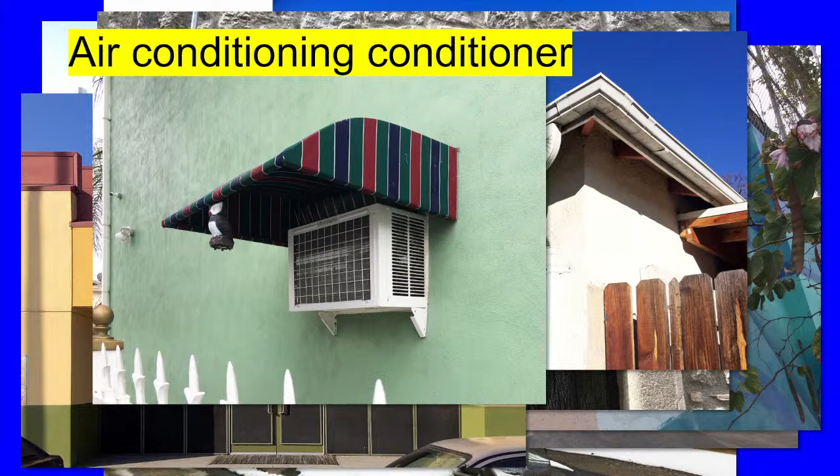In the book, there are technological adaptations that require pretty basic workarounds, recognition of the adaptability of the parking lot, which recurs. This is from outside the Foro Italico in Rome—this is the parking lot outside, and there's some construction going on around it, and there's just this eye from one of the sculptures basically parked in a parking lot stall.

The sort of flexibility of parking lots is something we've been quite interested in recently as well. They're ad hoc interventions that present practical solutions to problems not as far away from the field of architecture as they might seem. This is in the suburban area of Los Angeles, and it always struck me as something perhaps closer to a Venturi Scott Brown project than anything else, particularly with the antenna. This is kind of amazing.

Some of the images are concerned with the stubborn impropriety of life safety equipment and communication devices. There's actually a Los Angeles Times article about a kind of fungus creeping into a suburban home, characterized as related to the proliferation of satellite dishes around the city, or buildings that embody the formal qualities of a free, purportedly easy-to-use digital modeling software.

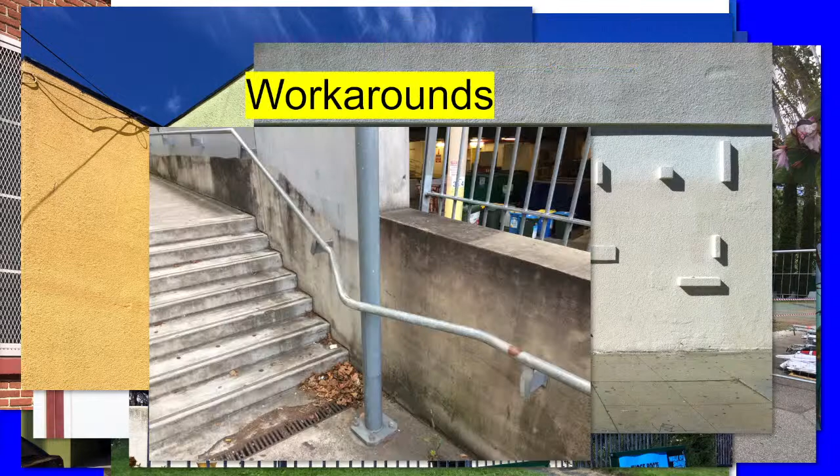There's objects which seem rudely unaware of their presence in disrupting a scene, and building elements that attempt to portray a stark and serious tone but instead end up offering opportunities for humor, irony, and pun. Buildings that call attention to themselves.

And those that call attention to the formal expression of security, the use of architecture to regulate space, not only functionally but formally, as an ever-escalating confrontation of resources that will demand increasingly radical tactics as economic disparity and housing instability continue to increase.

So while many of the images were originally circulated on social media, on an Instagram account which we took down, we thought it important to look to another space of distribution.

The book, called Best Practices, is a companion to architecture and its messy relationship with building materials, signage systems, communication equipment, plant life, and people. It was supported by a Graham Foundation grant and edited by Courtney Kaufman and Christina Muschel, a student of mine, with a foreword by Sylvia Lavin and contributing texts from artists and architects.

And it offers a way of thinking about neighborhoods, housing developments, streetscapes, storefronts, and interiors as places defined as much by building codes, dimensions, and geographic features as assemblages of impromptu interventions and incidental ephemera.

Trying to recognize that there's ingenuity out in the world, sort of ad hoc ingenuity, it's typically under-recognized in the field of architecture, and images like the ones I showed are typically not included in the catalog of references currently accepted by the field.

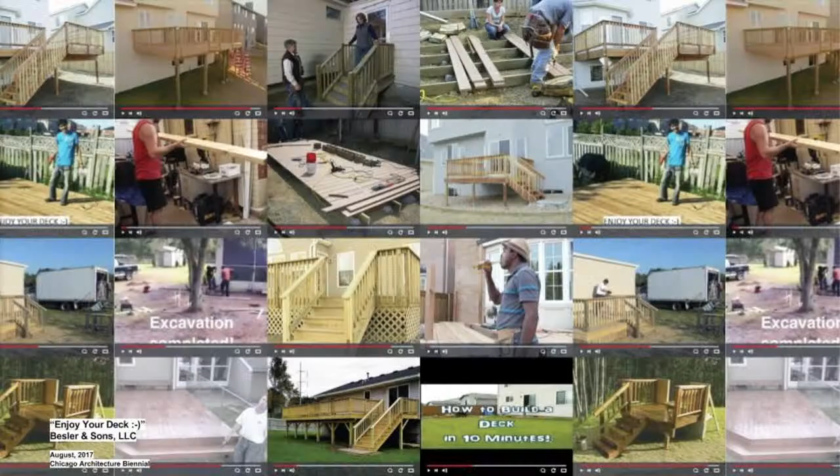This is a project that was exhibited at the Chicago Architecture Biennial, where we were asked by the curators to make a model of a canonical interior. That word, canonical, was something they gave to us.

This project is called Enjoy Your Deck, and it's an architectural model of an online how-to home improvement video of a backyard deck, constructed from paper and digital screens.

The project tries to reframe online video sharing platforms like YouTube as a contemporary category of media that circulates imagery while also generating its own set of language, media, data, and associations.

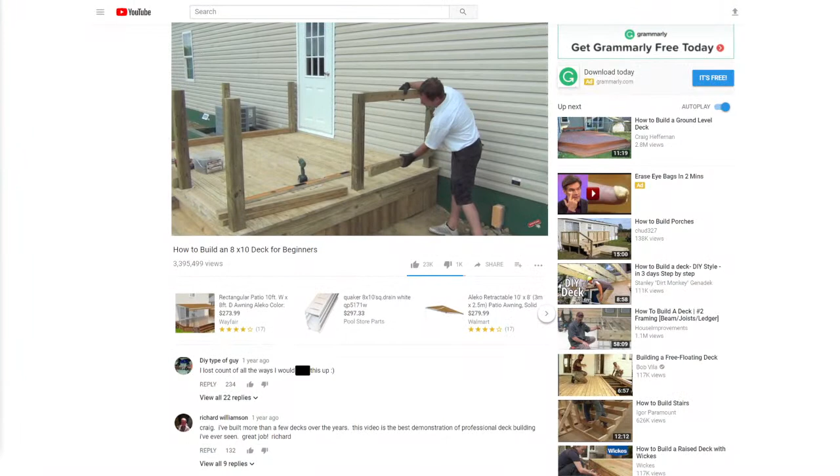Like through comment sections, view count statistics, recommendations for related viewing, pop-up advertisements, closed captions, and various options for sharing with friends and across social media.

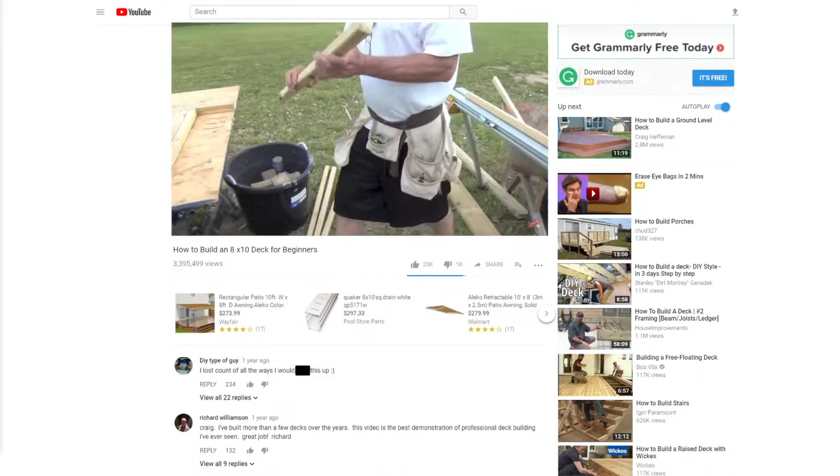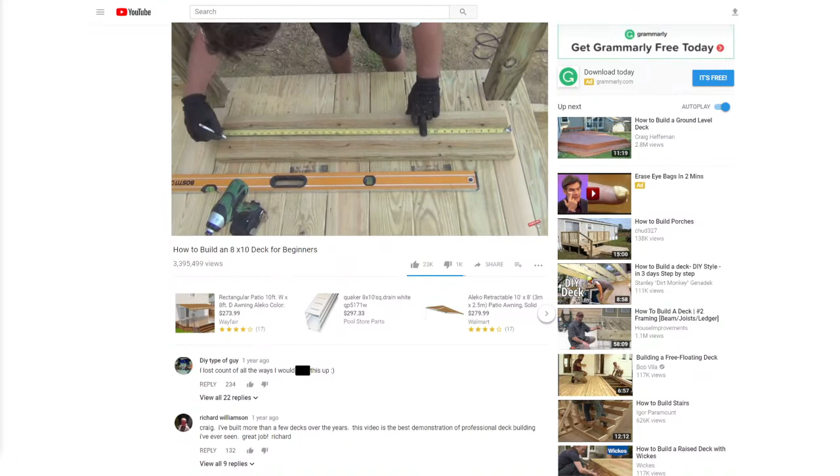Maybe because they're more easily relatable and somehow more linear than other kinds of instructional content like user manuals, these videos have become a way for individuals to find a meaningful forum to insert themselves as both producers and consumers into the discourse of designed objects and experiences.

Those short narrative clips that you find on YouTube for instructional videos provide an important component of how construction and building practices manifest in media imagery, and how issues of labor, competency, and discourse are staged around the sites of production.

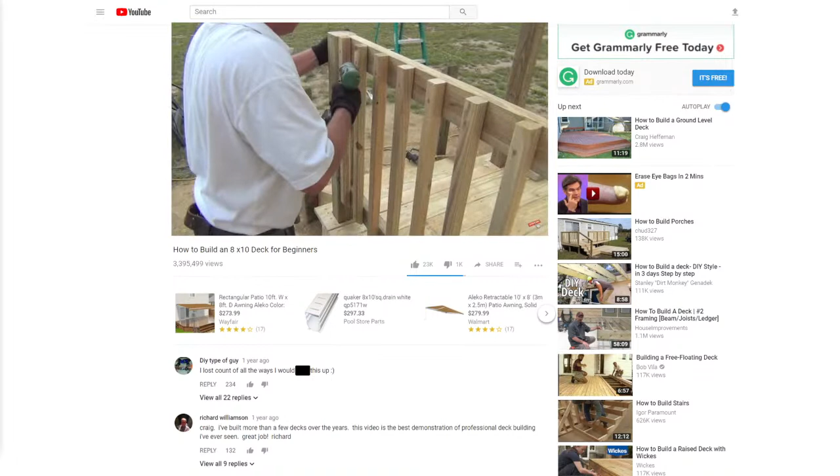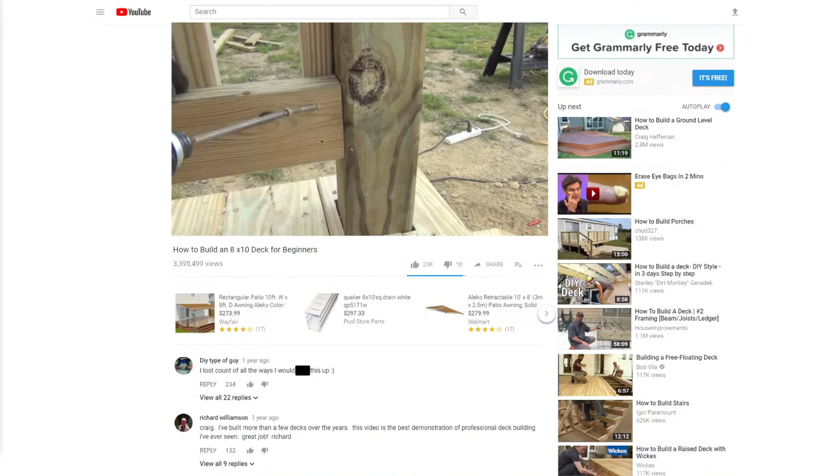What's kind of incredible is if you just search 'tutorial video' or 'instructional video' on YouTube, there's like 7 million results. So it's a lot — it's a huge category, one of the biggest categories of video on YouTube, like next to cats or something.

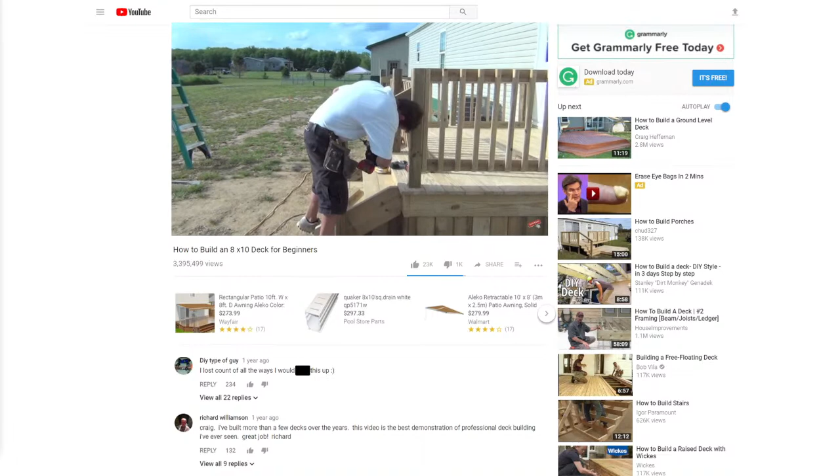So through sheer volume and ease of circulation, the category of media is elevated into the canon by presenting and prescribing the official way of doing things, and offering a space in the comments for ongoing litigation of terms, methods, and best practices.

Of the 200 million tutorial videos on YouTube, a huge number relate to relatively small backyard decks. So we made a scale paper model of a deck and made a YouTube video documenting the construction of it.

This requires just a little more than concrete, dimensional lumber, hardware, basic power tools, and a weekend. And given that almost all amateur videos are recorded in and around the home, whether in the kitchen, the bedroom, the den, or the bathroom, particularly during COVID, they're inscribed with a uniquely domestic focus.

So there's a really broad spectrum of instructional videos, from the concise and deliberate and coherent to really esoteric and bizarre instructional videos. I'm sure all of you have watched a YouTube instructional video, probably for software or how to do something in your home that you didn't need to know how to do.

But the sort of range of them and the capacity for us to comprehend them points to the potential that online media platforms possess for flattening previously recognized distinctions between amateur and professional practices.

So much of the content that viewers and software users encounter online today is dictated by the vagaries of search algorithms rather than other forms of defining expertise. Also PageRank algorithms, which often privilege categories such as collectively derived relevance and recently uploaded content over historically favored credentials.

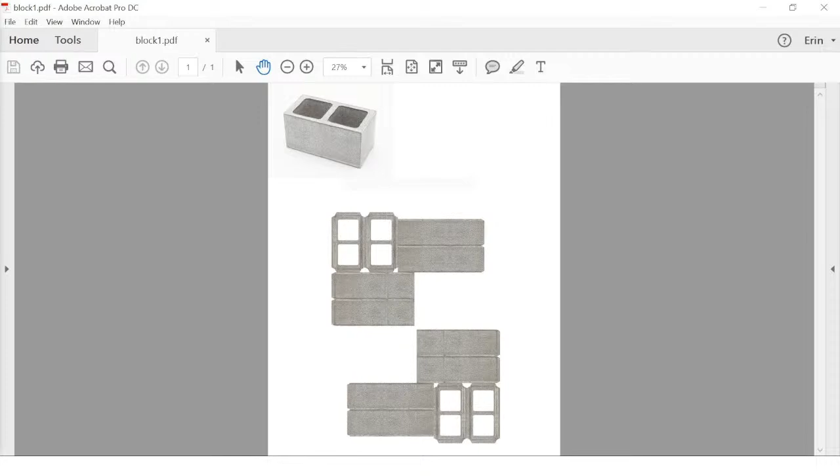So you can go to our website and download PDFs of these unfolded models and fold them back up and make an exhibition of your own. Everything from CMU blocks to trash cans and tape measures.

So we're in the process of making this into a book, which would include all these kinds of paper doll kits of backyard objects and tools, as well as interviews and conversations with builders and people that work in their backyards, as a way to begin to expand the project outside of the architecture world.

Alongside these questions of expertise, we've been working a lot on questioning the effects that architecture has had on the environment, which are staggering, really, really staggering. But our hope is that by reimagining and questioning some of the things that got us here, we can produce new models and values for architecture.

So more recently, I've been working with a group of students at Princeton and an organization called RARE in Philadelphia. It's a recycled artist residency located on a construction and demolition waste center in Northeast Philadelphia, called Revolution Recovery. And we've been working on issues specifically related to timber framing and the cycles of wood as a building material.

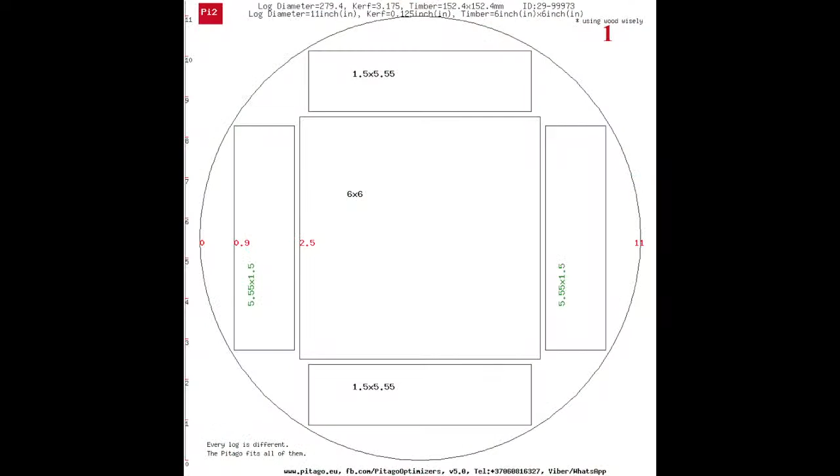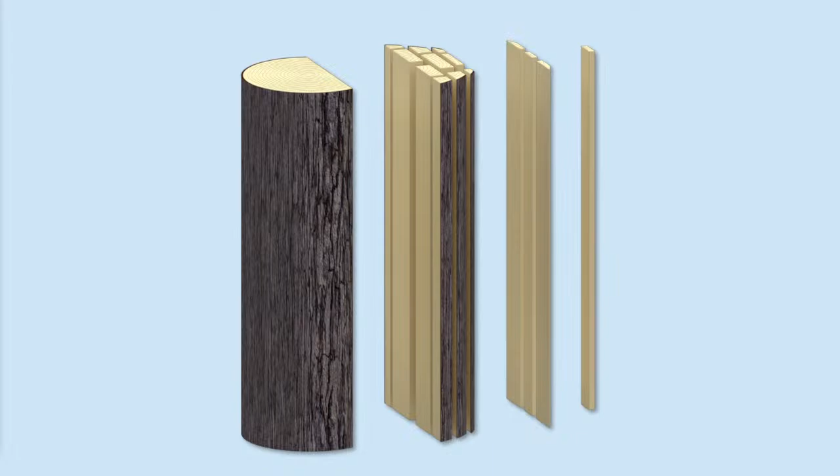It's kind of incredible the extent to which the processes that we impose on trees to turn them into building materials denature and abstract them, and basically turn them, in the process of industrialization, all into the same thing.

It makes it easier to forget that these things come from the earth and that they're actually not all the same. It actually makes it easier to throw them away.

So many buildings in the United States are built largely from wood, residential housing in particular. It's relatively fast, the methods are well known, the literature is widely distributed. This is a kind of amazing thing to me.

There are so many books on wood frame construction, for expert and non-expert alike. But it's all built on a continuation of the narrative of extraction linked to a definition of progress, from at least the early 19th century in North America.

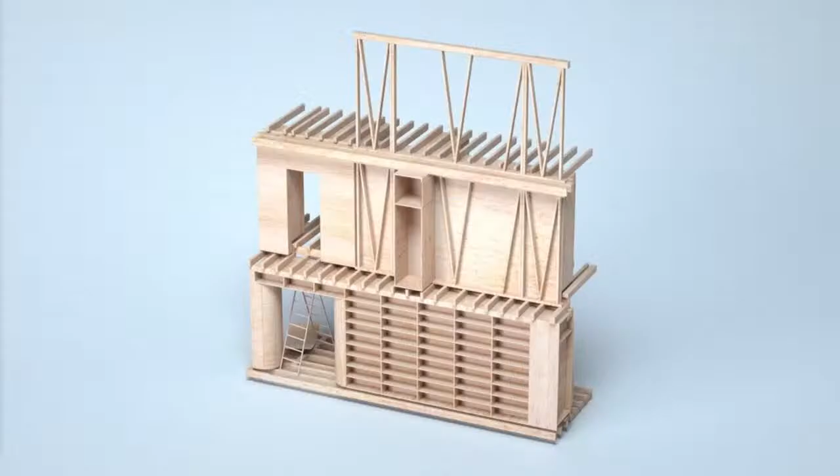Today, wood, or trees, are among a long list of material systems that stabilize, insulate, weatherproof, and make homes meet the standards of habitability today. At the same time, those things that make buildings work also make them more opaque to the average person, making it harder for homeowners and occupants to understand what's in their home, what it's made of, and harder for them to have access to it and know what to do to maintain it.

So we've been working on ways to catalog houses and reimagine them as representations of some of the largest building stock, as material banks, not just as where material goes to die. Reimagining them as material depots to be recirculated and used again, shifting the extractive conception from something stagnant or valued largely by the number of bedrooms and bathrooms, driven by the real estate industry, to something valued for its material composition, like a material supply center for future use.

So these are images of a house that we're working on right now. The ideas are not new and have been largely informed by conversations with an engineering firm called Arup and their work into circular design.

Parallel to looking at existing building stock, we're also interested in the implications that surround ideas of deconstruction rather than demolition.

If people had access, if you reconceived a wall not necessarily as something that's just partitioning space and holding a building up, but actually storing stuff, and thought of the life cycle of materials as not infinite but finite, and the fact that you need access to things to replace them if they get damaged, then perhaps you can begin to reconceive of a wall as temporary storage for building elements as well as clothes and things. Alongside this, we've developed an app, or actually a website, called Housemate.

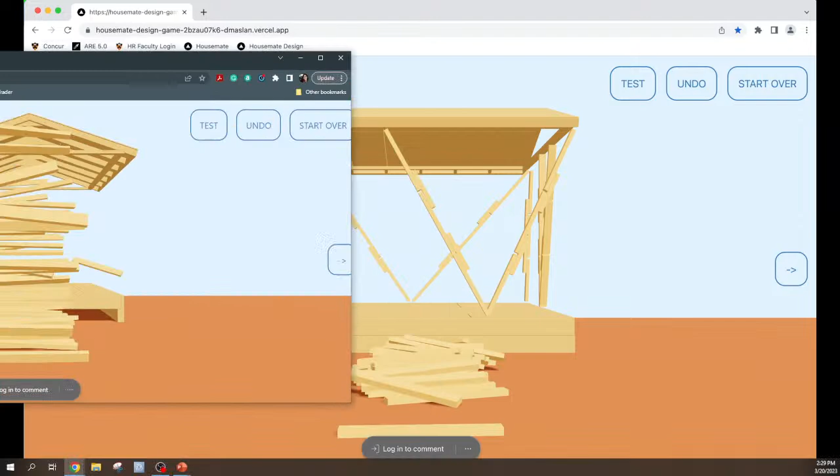Oh, do I have access to the internet with this thing? Yeah. Oh, does this work? Here we go. So we've been working on this little app too. I think you should drag it from the screens. You can see it, right? No, I think that's the slide. Oh, it is? Yeah, there we go. Oh, but now I can't see what I'm doing.

So we've also been working on this other part of the app, still under development, that would provide people with an opportunity to think through a pile of material and reuse it to construct something that's stable, and uses the least amount of material to make something stand up. It's a bit pedagogical, a bit instructional, but also supposed to be fun. Eventually we'll have information about how much material you're using and whether or not the thing is structurally viable.

So where's your test? Oh, that one wasn't very good. Anyway, okay.

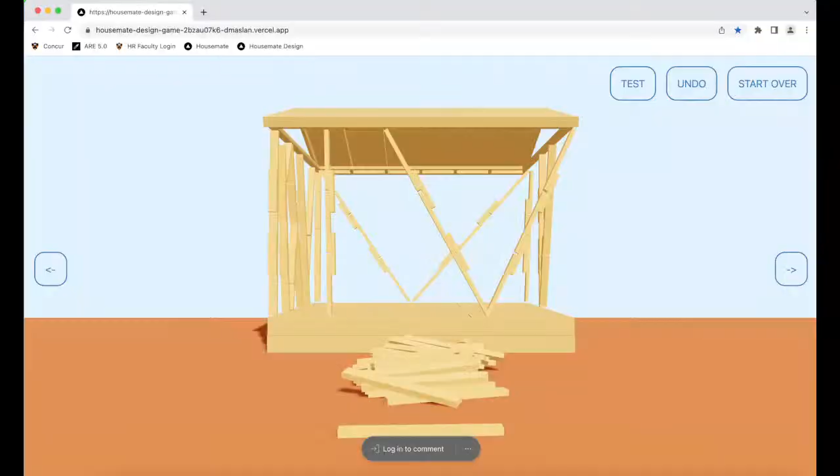So along these lines, when we were asked to put together a proposal for the Young Architects program that the Museum of Modern Art used to host—I don't know, it's on hiatus right now. Has anybody heard of the MoMA PS1 Young Architects program?

MoMA PS1 is a museum, part of MoMA, but located in Long Island City in New York. Every summer they have a concert series called Warm Up, where each week there's a different performer, and it's huge—thousands of people come. They used to invite, and maybe one day will again, young architects to propose an installation for Warm Up, for the concert series. It would just be over the summer, up outdoors for like 11 weeks.

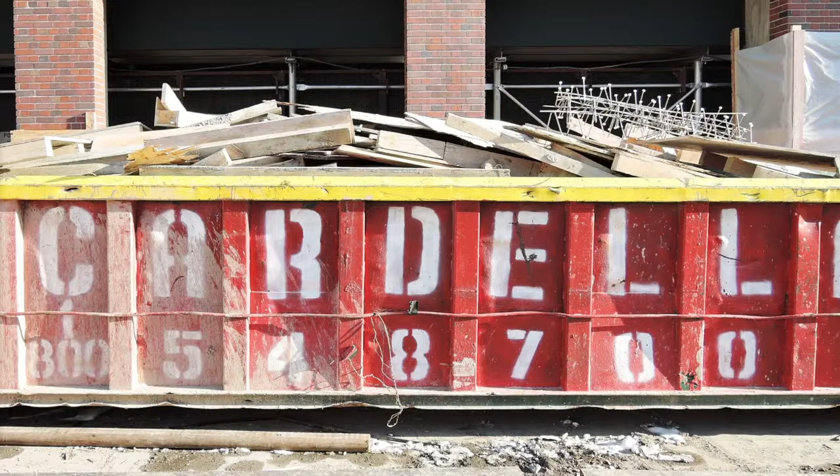There weren't really very many requirements. It had to provide shade, collect water, and that's about it, I think, and maybe provide some seating. But most of the time the PS1 projects, at least historically, what we recognized was that they really were just kind of like a backdrop. They sat in the background, and it just seemed like the museum was trying to get them out of the way, like architecture was a kind of apology for this huge concert series that was actually the focus.

So when we were invited to propose a project for this Warm Up concert series for the Young Architects program, we thought critically about the fact that many of the things that produce construction and demolition waste revolve around the idea that waste is considered a problem relegated to building and industry rather than architecture—it's not conceptualized. So this project tried to reimagine waste and began with the premise that everything in architecture is already recycled in some way, already a variation of something that's come before, and in a sense reused. We look at things built before and reuse forms, take ideas from things that happened 10, 20, hundreds of years ago, and we reiterate and repurpose things, and those things aren't wasted. So why in architecture have we had such a conceptual problem with physical waste, construction waste, material waste, and what can you do with it?

So the project—we proposed reusing the form of the existing roof of the building and relocating it into the courtyard. Let me see if I can find the mouse. Okay, can you see it? That triangular thing you see, that's the courtyard, where the concert series happens.

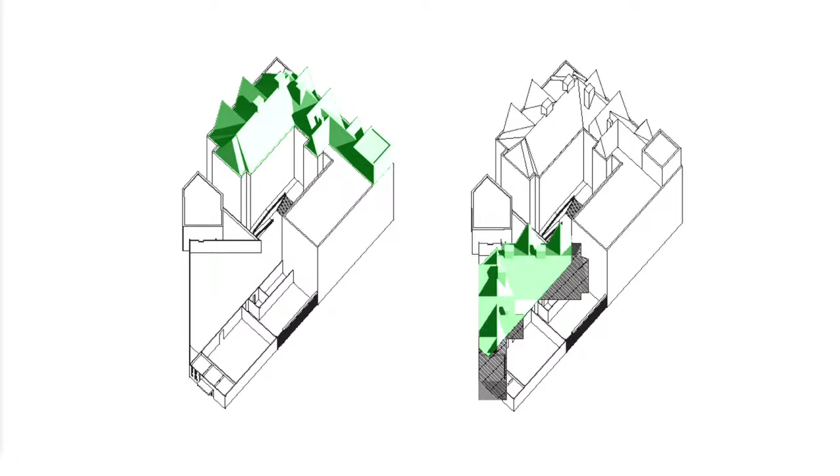Whatever was being designed had to fit into this sort of funny shape, a truncated triangle. So we proposed reusing the roof, fitting it into the courtyard, bending and breaking it so it fit, and then exposing the structure of it—making visible the things we typically don't see, like the trusses that hold it up.

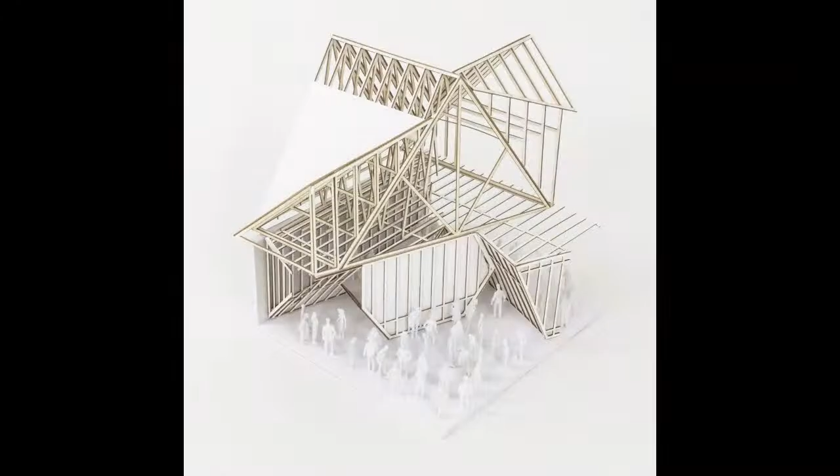These are just parts of it. The idea was that a group of people would come together on site in a kind of community event during construction, like to raise the roof, much like a barn raising.

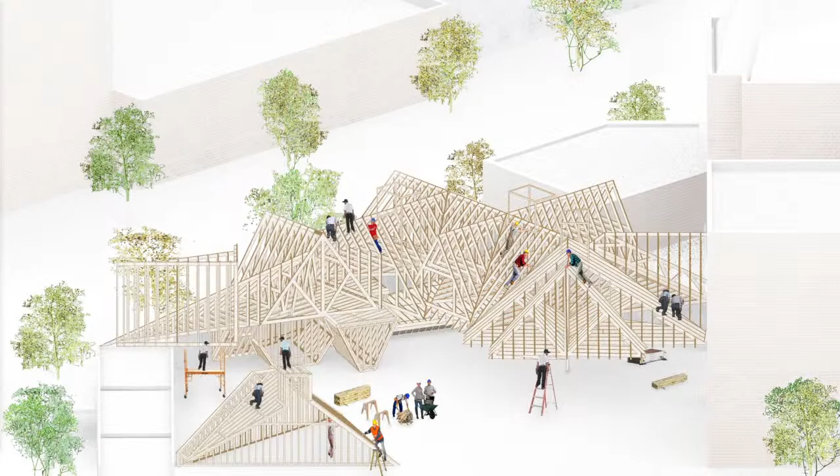It wouldn't just sit in the background, but would be a sort of totalizing scheme that provided shelter, and also, since one of the main functions of a roof over any building is to collect water and drain it, there was going to be an extensive system of gutters to manage water on site.

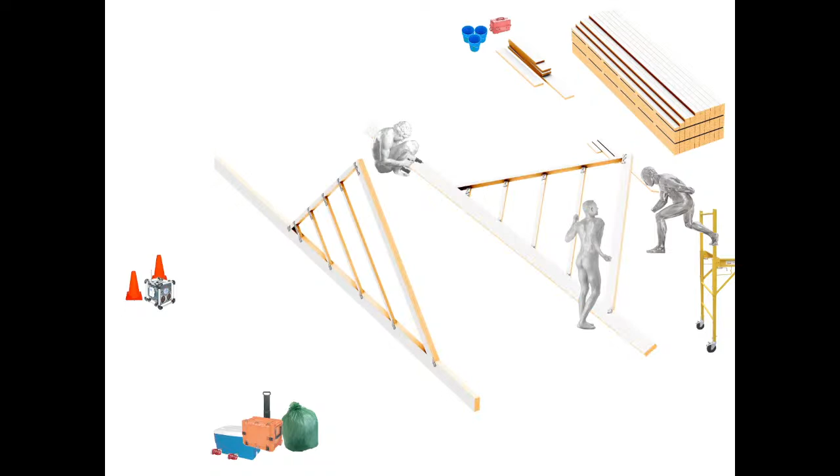All of this information about assembly, on-site material handling, and waste procedures needed to be communicated in the field. One way we did this was through a set of instructional videos or GIFs that demonstrated how a generic assembly of elements could occur on site.

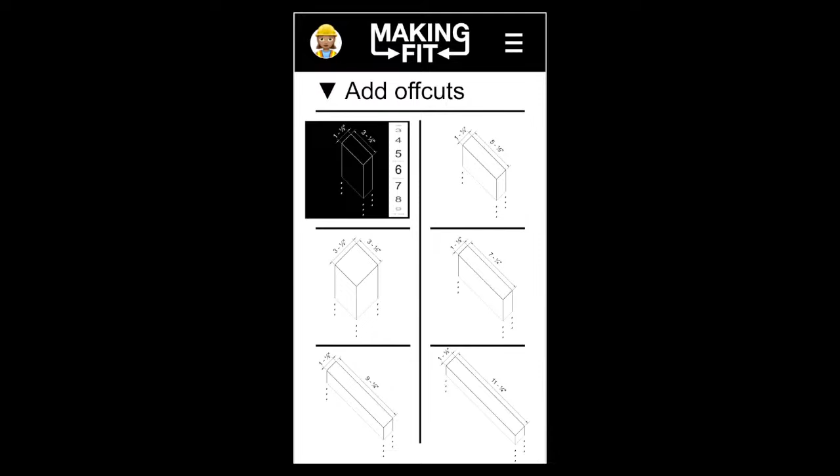But because not all instances are the same and it's actually kind of difficult to fit together, we developed an app to move the generic condition into something more specific, accounting for deviations from standardization. It seemed to us that most waste produced during construction results from either excessive over-ordering or offcuts that are no longer standard lengths, since it's easier for contractors to take a new piece than to reuse one. So this app was meant to be a material management system to recirculate offcut pieces into the project in a kind of zero waste approach.

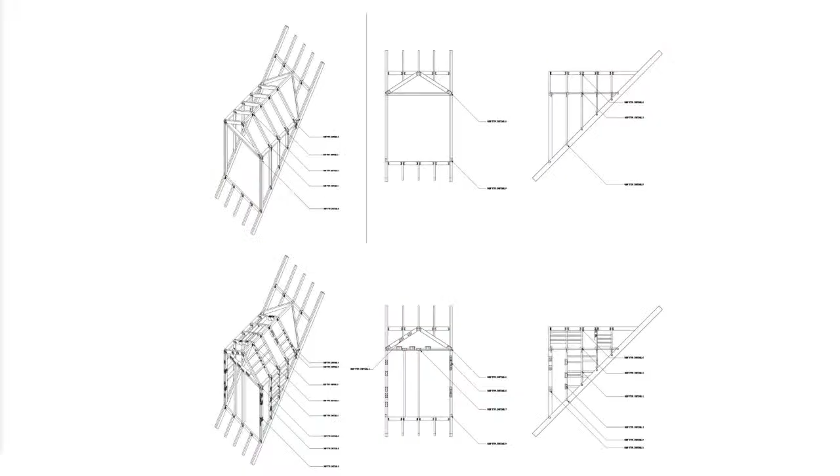Okay, so there were details to track the reuse of materials and assembly of things, and this idea of making fit. When something is not fit for use, it's categorized as waste. So the whole idea was to reconceive of objects as not even entering into the category of waste, by recirculating them on site. We extended this idea of fitness through the rest of the project as well, and proposed that since MoMA had their summer concert series, we'd propose a summer physical fitness series to make people fit as well.

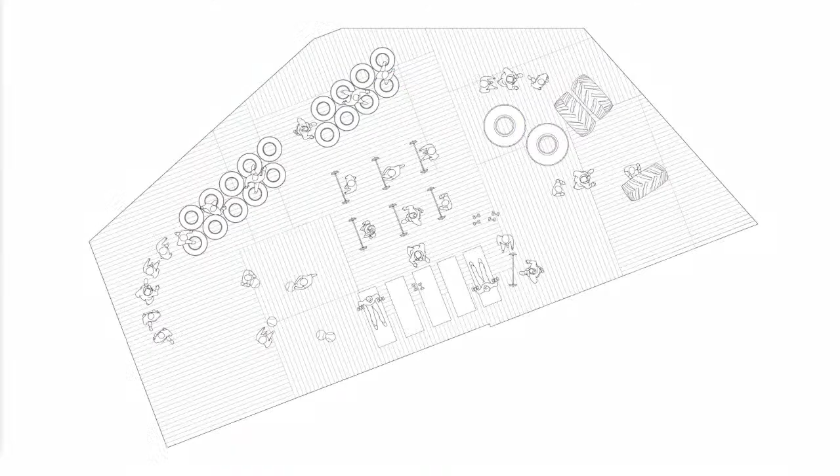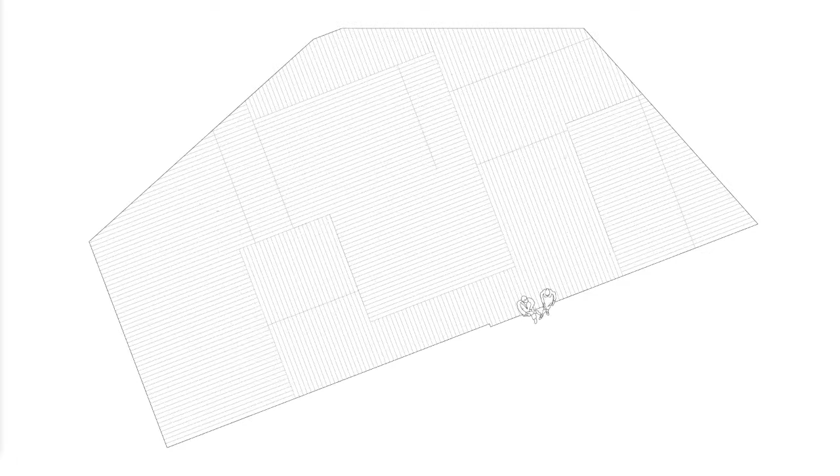And they really just did not like us suggesting programming that conflicted with their concert series. Anyway, there was a dance deck or fitness deck that would host different kinds of programming, from CrossFit to yoga to spinning. The reason I showed this project is as a way to open up a conversation about how what seem like really practical problems can be pushed through an entire project and inform conceptual decisions as well - maybe ones that clients don't entirely like, but you sort of have to try.

This is maybe the last project I'll show, and this project has been through a lot of versions or iterations. It was first shown in Los Angeles at the MAK Center for Art and Architecture, then at the 2015 Chicago Architecture Biennial, and then at the University of Technology Sydney Art Gallery. Each time it moved to a different place, it sort of snowballed and gained other aspects of it.

This kind of concern with systems of circulation, distribution, and regulation, and access to information informs a lot of our projects, in particular this one - from large-scale home improvement centers to local hardware stores that cater to and support the maintenance of local communities, and the availability of many consumer-oriented building materials that often stand in stark contrast to some of the dominant narratives that try to distinguish architecture from building.

The entire situation was a kind of participatory exhibition and installation, and looked at everyday aspects of construction and things that have been relegated to practice, like building information modeling and studs, and tried again to take something really practical and push it through something conceptual - a sort of conceptual design framework.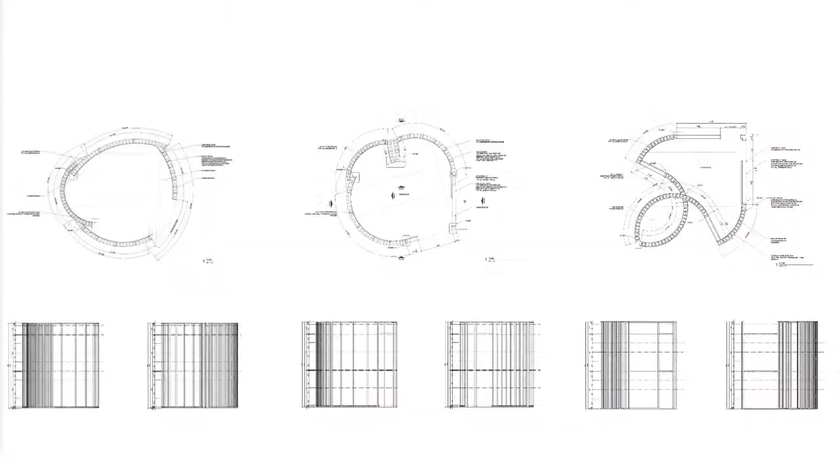So each version of the project deals with the kind of problems that arise when you move across platforms, like from 3D modeling software to BIM, and then through large systems of materials distribution and circulation to a piece of construction. In this case, a series of freestanding rooms.

There were three rooms that were kind of like little squiggles in a gallery. What we did was we tried to design something in Revit and then build it, literally, and not erase or mute any of the aberrations that are produced by the software - as a way, one, because we thought it was beautiful and interesting.

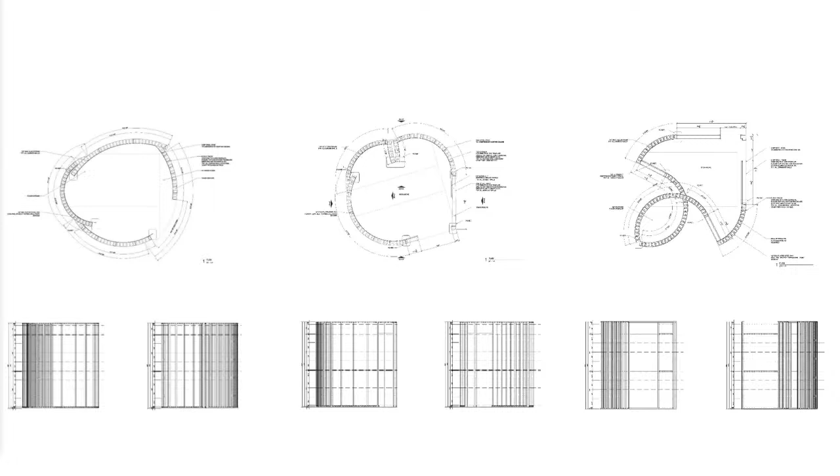But also because it was a way to look critically at this software platform that the field of architecture, the practice of architecture, or even the industry that surrounds it, has purported as being something that facilitates communication and makes things easier, or helps to resolve collisions. We just saw it as something that had a lot of trouble resolving those things, so we wanted to build those irresolutions.

Moving between these kinds of platforms, or different ways of ascribing value to things, causes aberrations. In this project, it was all registered through the appearance and disappearance of details, corners, and seams - really just letting the molding do whatever the software said it was going to do, and not erasing those kinds of things.

It also registers the fact that the front side of the wall and the back side of the wall are very different, ontologically, very different surfaces. In architecture we're really concerned with fronts - we pay a lot of attention to them, we finish them, we detail them in specific ways, we inspect them in specific ways. Usually backsides, or the things we don't see, like framing, are relegated to the realm of building. This project tried to recuperate some of that space and expose it.

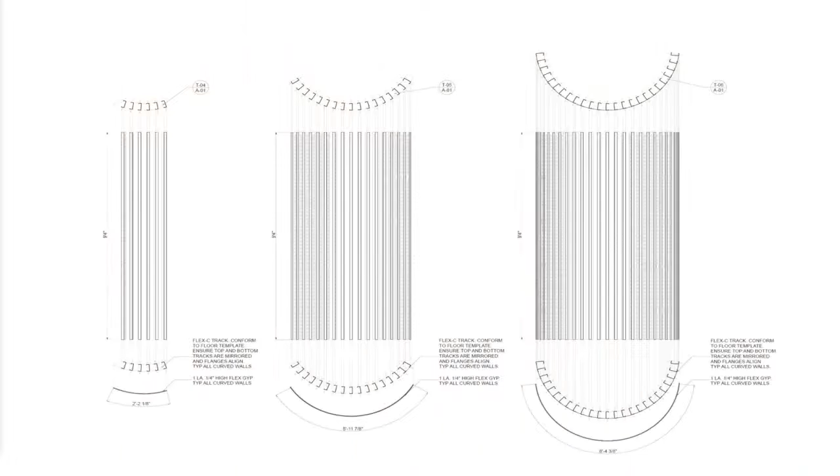And you know, I'm sure you can tell there are too many studs - there's more studs than you need to hold these walls up. But we were interested in the studs doing a different kind of work.

It was more like measuring and marking the form than just something structural, something a bit more conceptual. We also thought we were going to save a lot of money. We told the contractor, you only have to finish one side of the wall, so we thought it would cost half as much as doing both sides.

But as it turns out, when you ask the contractor to pay attention to the studs, and they have to be perfectly straight and clean, treating a stud like an art object, it actually costs more.

We also asked them not to do what rule of thumb dictated. Studs come with manufacturer instructions about spacing, and drywall comes with data sheets about how tight curvature can be. We asked them to work outside those limitations, so radiuses were tighter and there were more studs than needed. We were trying to call attention to things that aren't typically looked at or cared about.

One of the really interesting things that emerged from the project—it's always interesting when you look back, or you're in the middle of something, and realize you're doing something you didn't plan on, or produced something as part of the design you didn't realize was designed to begin with.

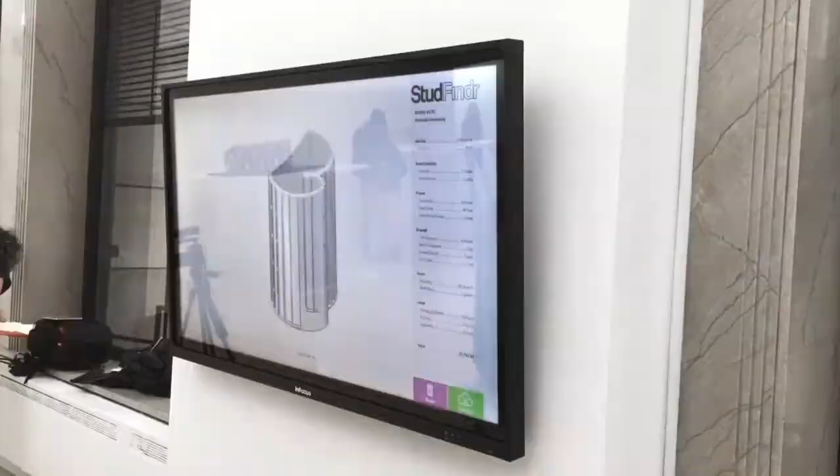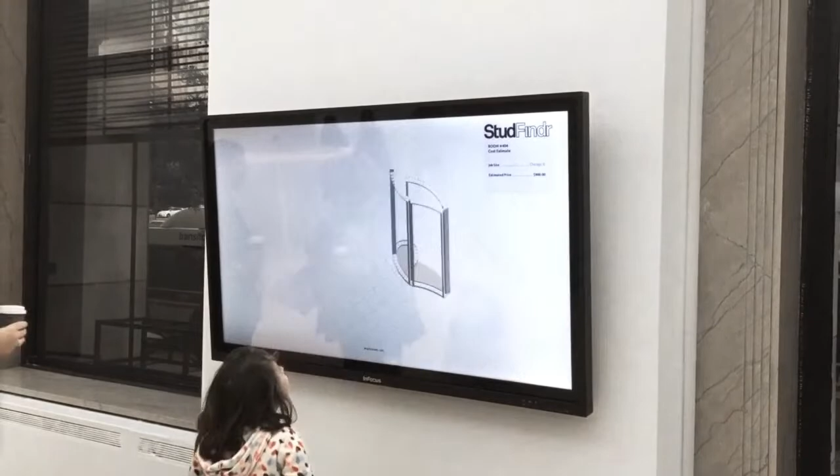We see digital tools today as a pretty ubiquitous space to work within, and the question no longer seems to just be, at least for me, how interesting or resolved a thing you can make, but where does it end, and what's the separation—or why is there so much separation—between producers and consumers?

So as part of the app, you could also squiggle and make your own design, and then submit it using the little green button in the bottom. You could still go to studfndr.org and do this yourself and contribute to the project, or you could submit your design and it would go into the collective.

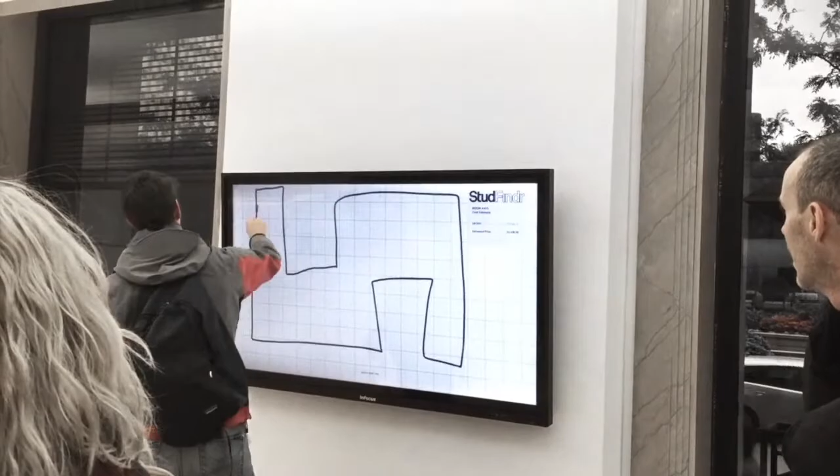You can see that it's basically taking every squiggle, even if it's like a pile of spaghetti or Bart Simpson's face, and bringing it back to 4 walls, because that's how we defined a room. Even if it looks like a straight line, it still produces 4 segments. If you submit it, it adds to the collective design and averages everybody's design together.

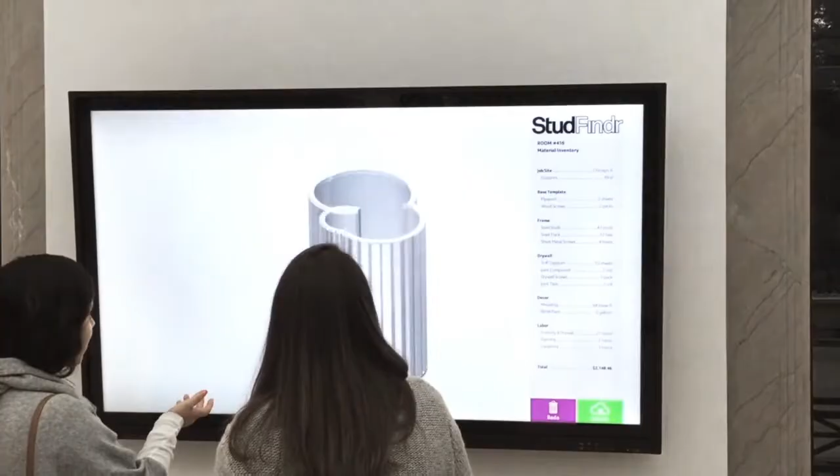And you could also download a plan of the room that you designed.

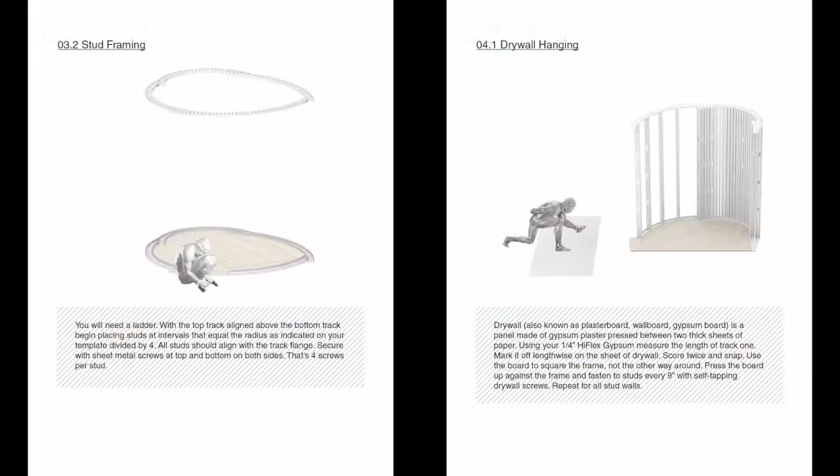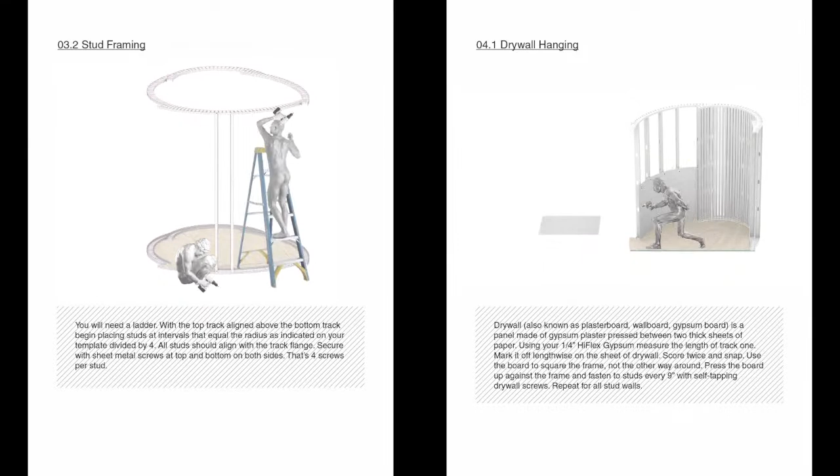Also along with that came a series of construction animations, GIFs, and instructional videos for how to do various things in building a room or wall, from stud framing and drywall hanging to joint taping and screw hole mudding.

Maybe I'll just stop there. Well, it's pretty hard, after the project, to go back and think about how much drywall got put up and torn down in the course of a few months on various continents. It's really hard not to be concerned with and increasingly aware of the environmental consequences of our projects, particularly those with relatively short lifespans, which is common in early career practices mostly working in exhibition and installation.

So I hope you all consider where your materials are coming from and where they're going, and also the people that surround those sites of extraction and the sites of dumping. That's it. Sorry to end on a down note.